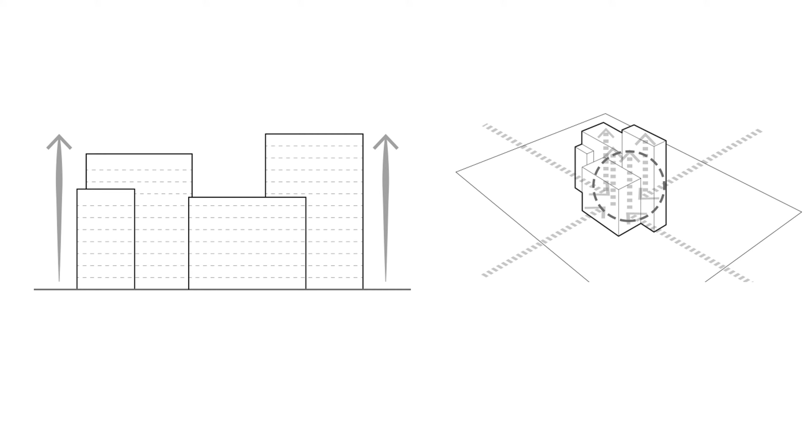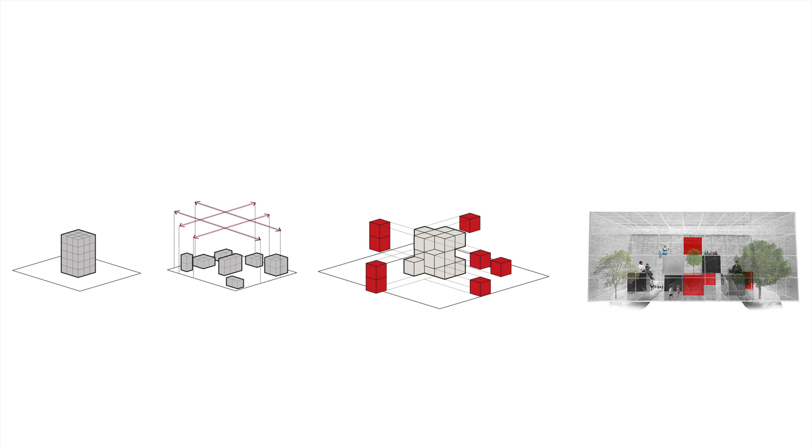The current problems of hospitals can be seen as starkness, hospital-specific coldness, and poor performance of screening clinics. I proposed 3 conceptual solutions to these problems. First, we plan to solve the fundamental problem by reflecting the concept of horizontal, and I want to create an emotional space by emptying the filled space. Finally, I planned a hospital that is not like a hospital with emotional space by bringing nature into the building.

Secondly, we are providing nature to patients in the ward by placing functions except for the ward on the lower floor of the podium and utilizing the podium rooftop as a green area. When this principle is incorporated into the pandemic age, patients in quarantine with limited green, location, and level cannot feel nature.

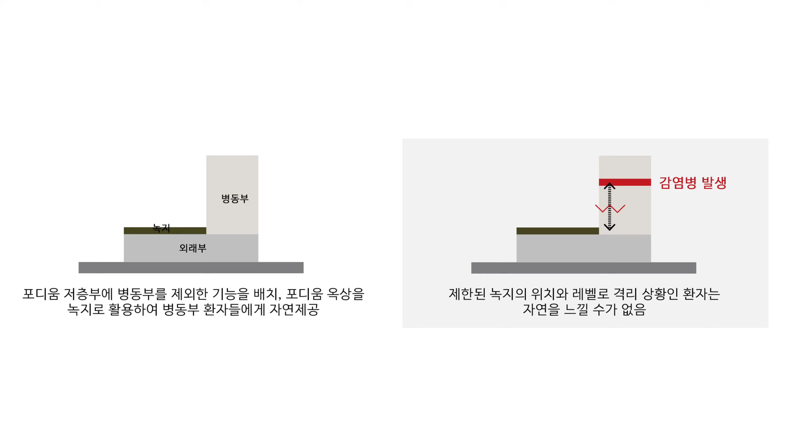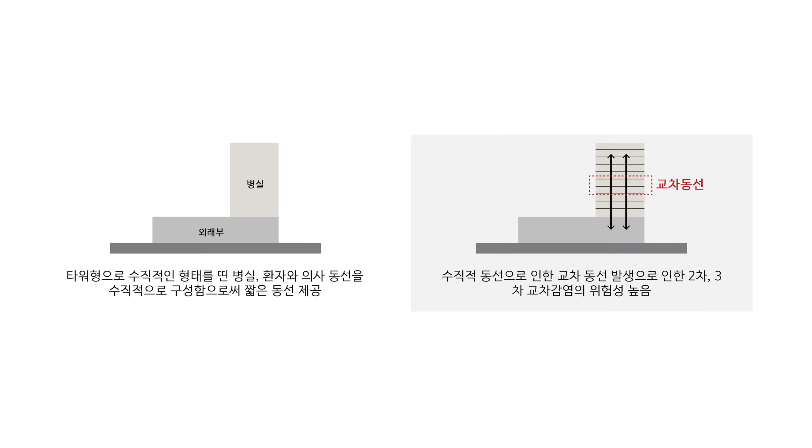Third, it is a tower-shaped hospital room with a vertical shape. It provides short movements by organizing patient and physician movements vertically. Similarly, applying this principle in the pandemic age poses a high risk of secondary and tertiary cross-infection due to vertical crossing of movements.

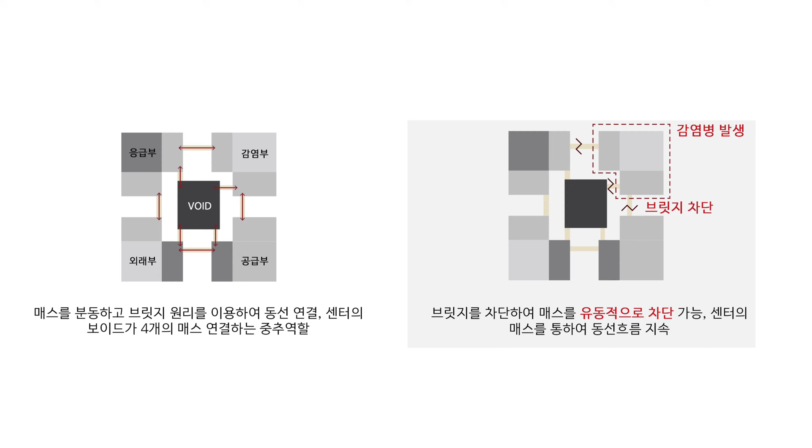First, we divided the mass in the existing principle and connected the flow using the bridge principle. The center's void acts as the backbone for connecting the 4 masses. If this principle is applied in the pandemic era, it is possible to block the bridge to isolate the mass fluidly. The flow of movement will continue through the mass of the center.

Next, we actively used the courtyard, terrace, and rooftop garden to bring nature into the building. When an infectious disease occurs, there are various levels of greenery, so you can feel nature even in quarantine.

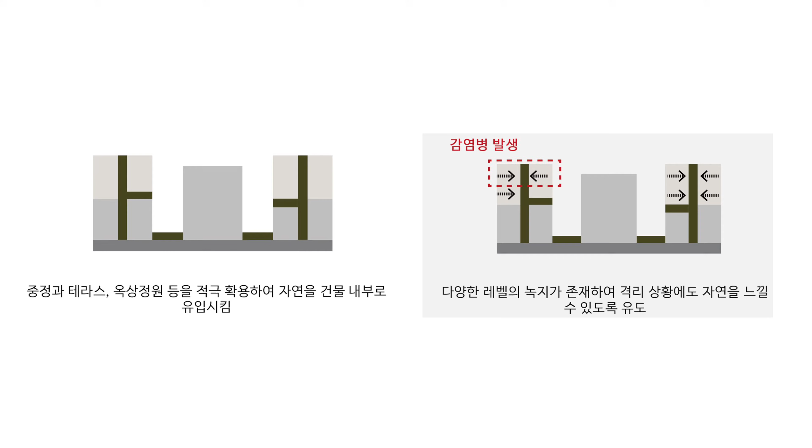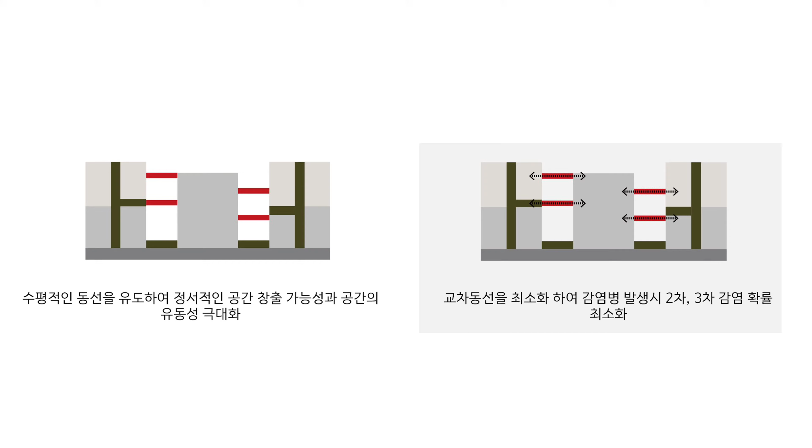Lastly, it is the principle of maximizing the possibility of creating emotional space and the fluidity of space by planning horizontal movements. This principle can minimize the chance of secondary and tertiary infections in the event of an infectious disease by minimizing the crossroads.

Yeosu City, Jeollanam-do was selected as the site for this project. Yeosu City has recently emerged as a tourist destination, so it is visited by many tourists. Along with Yeosu Airport, it also has a train station and port, so transportation is also good. However, Yeosu City lacks medical institutions, and there is no center specializing in infectious diseases. More specifically, we chose a place that has good access to the center of the city, but maintains a reasonable distance away from the city.

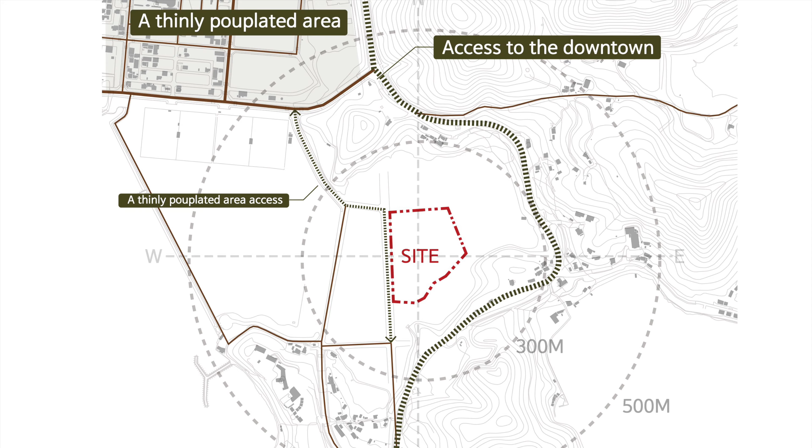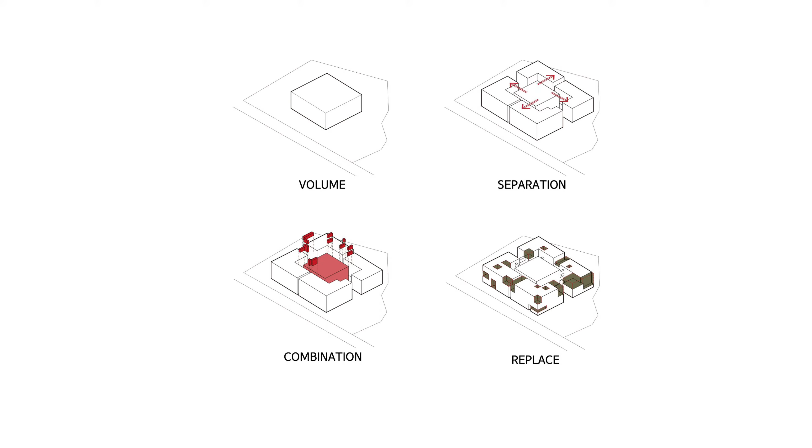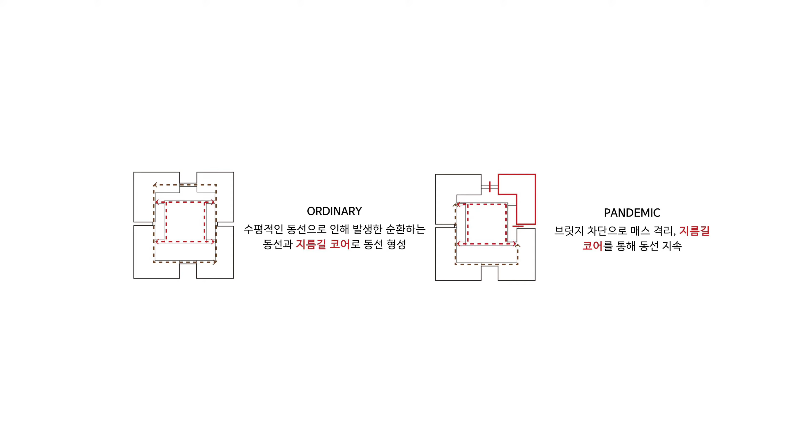Mass process. First of all, I formed a suitable volume on the site and separated the mass. The bridge enables flexible integration with the mass of the center. Finally, we planned to relocate the spaces around the place so that green areas could flow in. I will define the mass in the middle as a shortcut core. Normally, the circulating and shortcut cores that occur due to horizontal circulation lines are formed. In the pandemic era, there will be a fluid flow as the bridge blocks isolate the mass and the movement continues through the shortcut core.

This is the layout of the architectural application of these concepts and principles. The function, which serves as the center of the 4 divided functions, was placed in the shortcut core to induce the function to be distributed. The emergency room was placed in the northwest with the best accessibility, and the outpatient department was placed on the main road in front. Infections, specialized in infections, were placed inside the land, leading to no overlap of movements with ordinary patients. And I placed the management function on the remaining mass.

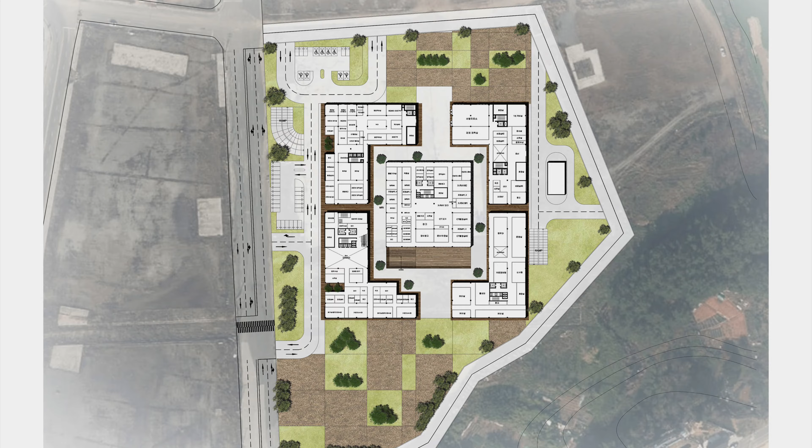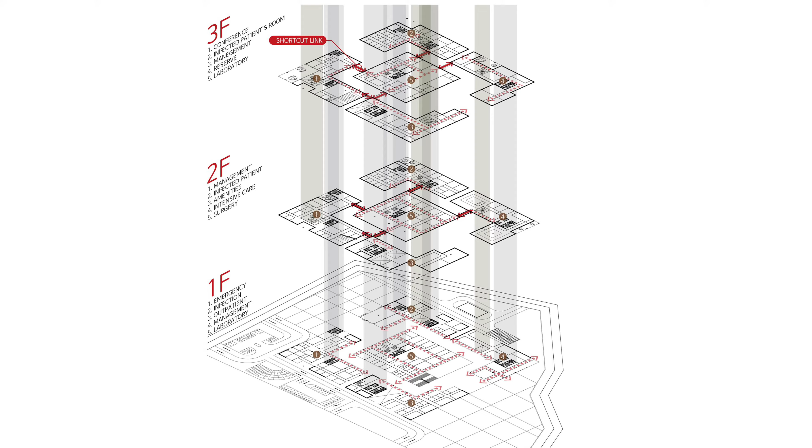From the perspective of the plane, the functions of the hospital except the ward were distributed around the shortcut core until the third floor. The bridges connecting to the shortcut core mentioned earlier provide a shortcut route, which is expected to allow for fluid isolation and blocking. From the 4th to 6th floors, it's the ward. In the ward, the shortcut core will serve as a convenience facility, drawing a community of inpatients.

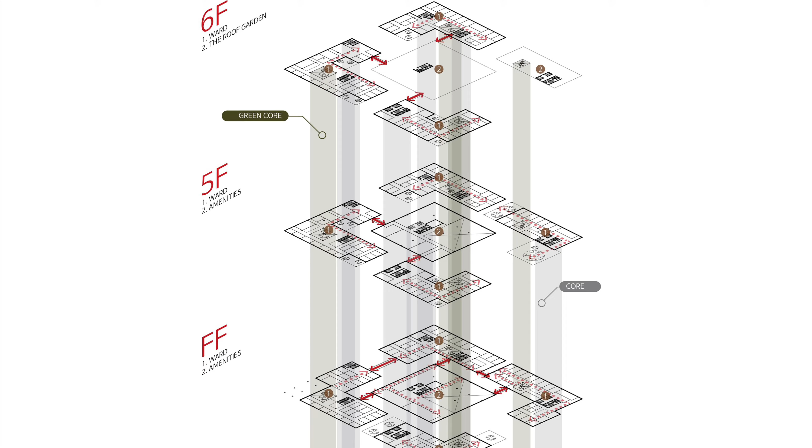We plan green areas throughout the hospital by applying the keyword of relocation. The center of the four masses was placed to create a vertical green core, and the terrace was placed in the empty spaces created by major functions entering the center, rearranging the space from the function to the emotional part.

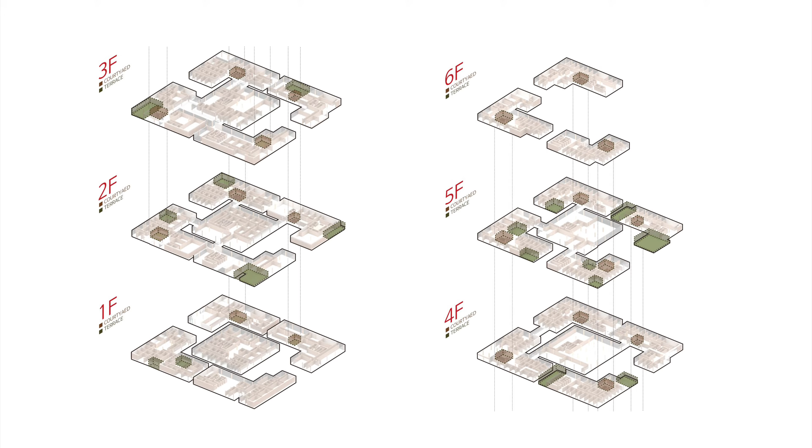Lastly, it's the design part. We applied the frame design to the void space in the center created while separating the mass. It has the meaning of solving the problem of filling the hospital today by emptying it. The frame design also features that enable the flexible movement of the bridge. I thought of a simple design that avoids excessive design in the elevation part shown from the outside. Due to the characteristics of the building called the hospital, the design was simply constructed with horizontal louvers indicating horizontality, because excessive design has a negative effect on patients.

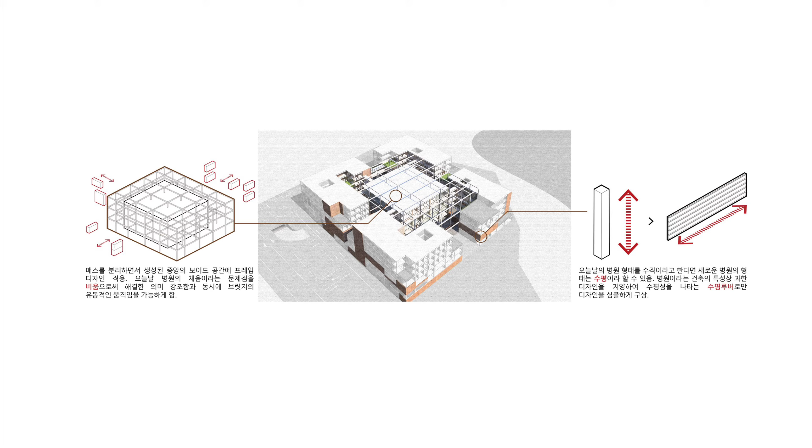Generally, the 30-year cycle is called the first generation. Hospitals in Korea started to enter in the 1980s, and now is the second generation. I just proposed one principle in hospital architecture for the second generation and wanted to raise the direction. We hope that hospital architecture will no longer be a rigid and functional approach, but create a second generation, devising various directions and new principles.